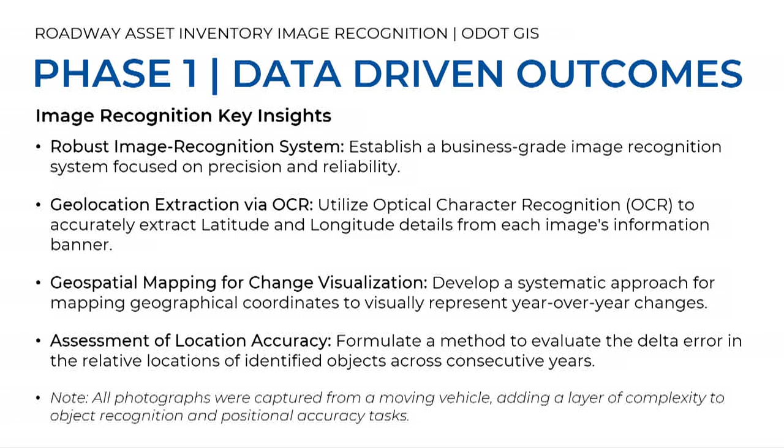In that first phase, we were able to model the majority of the assets. We looked at the assets, came up with a game plan and a statement of work on how we were going to tackle it, and we were able to produce some results. We took a stretch of roadway, and at first just bare bones asked, can we even get anything out of the video? And we were able to do that.

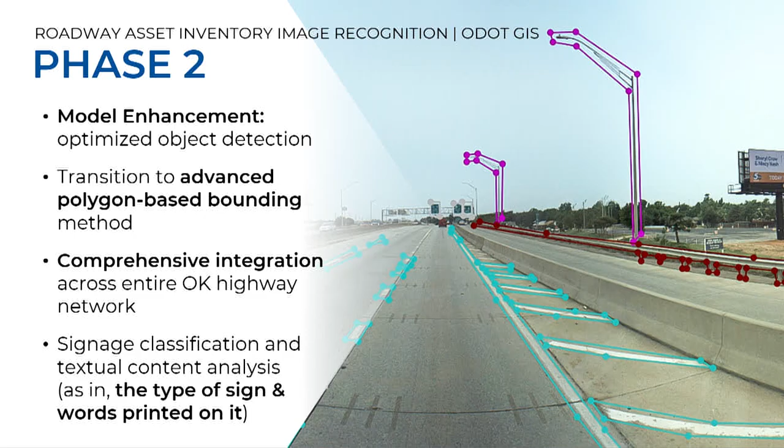So we moved into a second phase, and this is where we kicked it up a notch and really leveraged the Google Cloud platform and the AI processing within that. They were able to teach the AI to look for different assets, everything from light poles to the striping on the ground. The ultimate goal was to work towards more sophisticated components, the signals and lights, and eventually additional priorities there too.

The end of the good story is that over this last summer, we rolled this out to production, and it hits every single highway road mile across Oklahoma. That was about 52 terabytes of image data that we loaded into GCP and were able to process through.

So those 3.5 years of images - we went from taking a manual review of 2 years for one year of images, to getting through an entire year's worth of images in less than 3 months. It took a huge bite out of the manual lift to review those images.

The savings from ODOT's perspective: in that first year, if we had gone out and tried to use a vendor for this, it would have been pushing $500,000. We were able to do this for essentially the cost of the folks we worked with at OMES. We saved an estimated 10,000 manual review hours by the folks reviewing that video, which is a huge efficiency gain. We were able to take those employees who would normally be reviewing that video and get them reassigned to other priorities within the department.

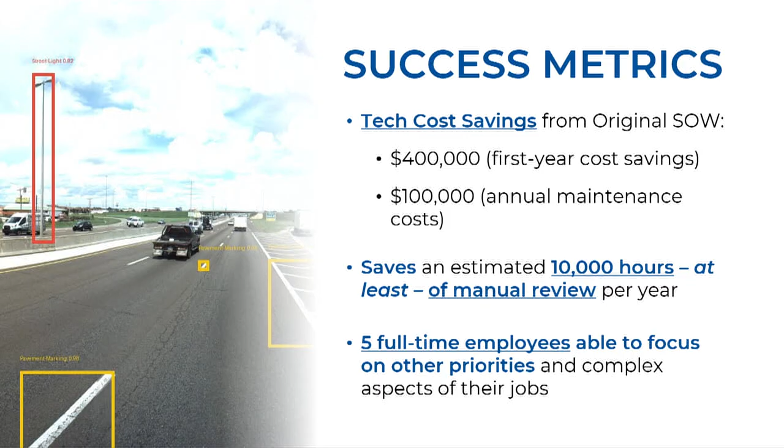So that was the first AI initiative that we tackled this last year. This next one had to do with our right-of-way deeds.

This one is a little bit similar. We've got a lot of paper documents, about 250,000 documents in total that have parcel deed information across Oklahoma. But we have no data on this - it's just paper documents, right? And so that's not super helpful for the folks at ODOT.

We have employees that would have to go into the filing cabinets if there was an open records request or even information the right-of-way team wanted to know. Very manual effort - go find it in the filing cabinet and then pick through it to figure out what parcel you're looking at.

So it doesn't sound like that big of a deal, but here's an example of one of the parcel descriptions. It takes a little bit of time for a human being to pick through that, and I can tell you from looking at a few of these from 50, 60, 70 years ago, they're wildly different. Sometimes they're handwritten, sometimes they have references that are a little bit hard to follow.

So what we were able to do was train the AI to essentially read that for us and cut out about 83,000 hours worth of effort. It was probably going to take us $6 million if we wanted human beings to go through and read every one of these parcels, about 20 minutes per parcel document if you were well trained. But the AI was able to read that in a much faster amount of time and give us an output, which is the parcel location, a traverse file that we can load into a GIS platform and then have a map of where this deed goes to.

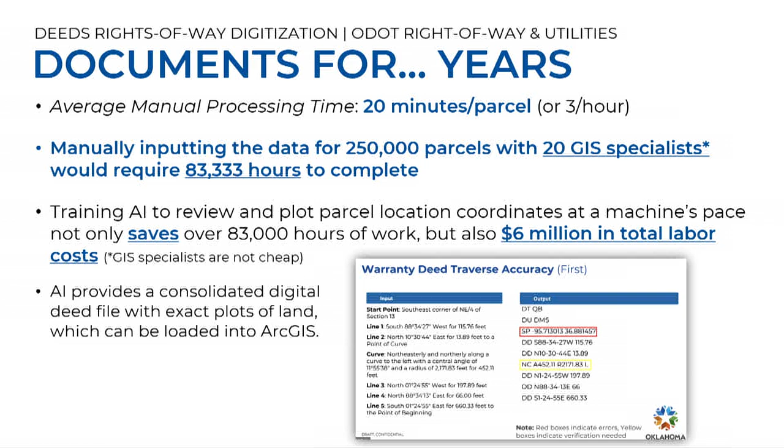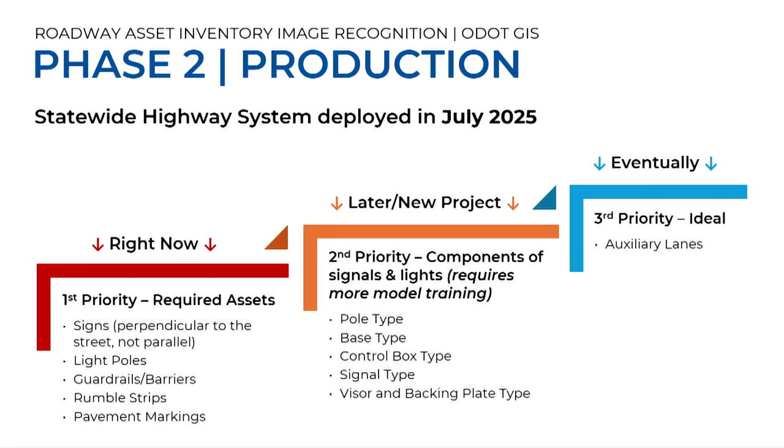Sounds good, thank you. Any other questions?

Providers, and you also mentioned about Google Cloud Services. Do you see any privacy issues with us releasing our data to third-party data providers, if they are proprietary data and so on?

That's something that we looked at when we started down this road, and that's built into the agreements that we have with the vendors, that none of our data gets shared with third parties. It's our data. Really, GCP is just a platform that we're doing our work inside of, and there's no risk beyond the usual security permissions and being able to share that out, the typical thing you run into with any closed system like that. But ours is Oklahoma data. We're not sharing it with anybody else, and we've looked at that carefully as far as the agreements we put in place before moving forward with any of the vendors.

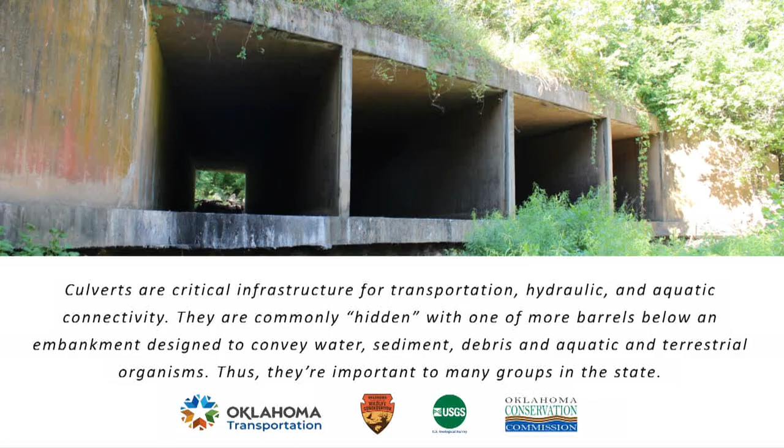So we've got a lot of people who care about these structures that we wouldn't normally maybe think about in our engineering practice. So our research, the primary objective was to first locate culverts - and we're gonna get into this bridge culvert discussion - to locate them, identify culvert characteristics that lead to vulnerability, but we also want to identify these partners who we know care about culverts, who we can work with to retrofit some road stream crossings, and we can align not only our infrastructure goals, but also conservation goals.

And so this project has been part of SPTC Cycle 1 and Cycle 2. Some of the strategic goals we felt like this hit was resilient infrastructure, resource allocation, and developing partnerships. We had a number of tasks, and I thought this first task won't be so hard, a collection of culvert locations. But boy, this task was harder than I realized. It's challenging - creating a database, doing some site visits, developing a vulnerability framework, looking at different mitigation strategies that might work for us here in Oklahoma, and then some reporting.

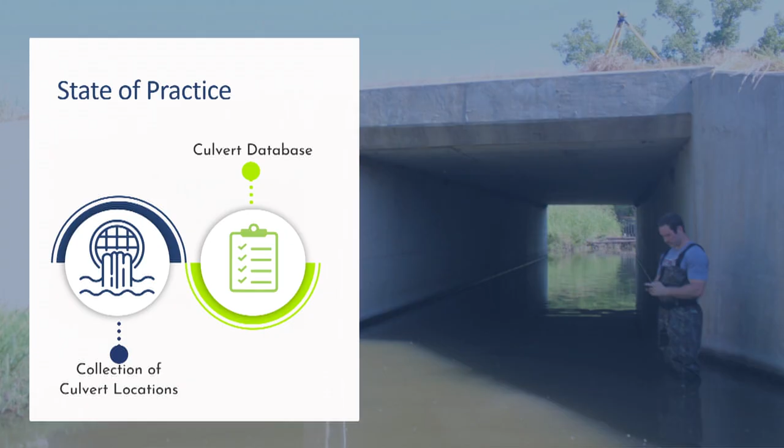Now, I'm gonna be honest, we spent a lot more time in these two tasks than I ever thought we would. So, for my bridge engineers, I looked to you all, and that's right, if it's over 20 feet, it's considered a bridge. It might look like a culvert, might act like a culvert, but if it's over 20 feet, it's a bridge. But the best data that we had, or the best asset management we had of culverts, were bridges that were box culverts or similar.

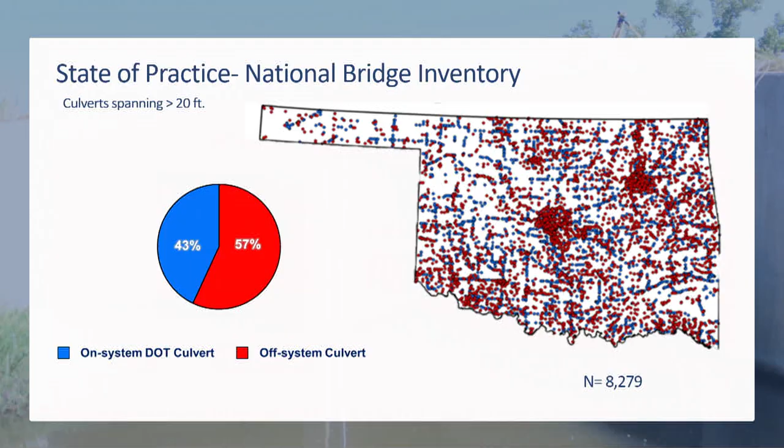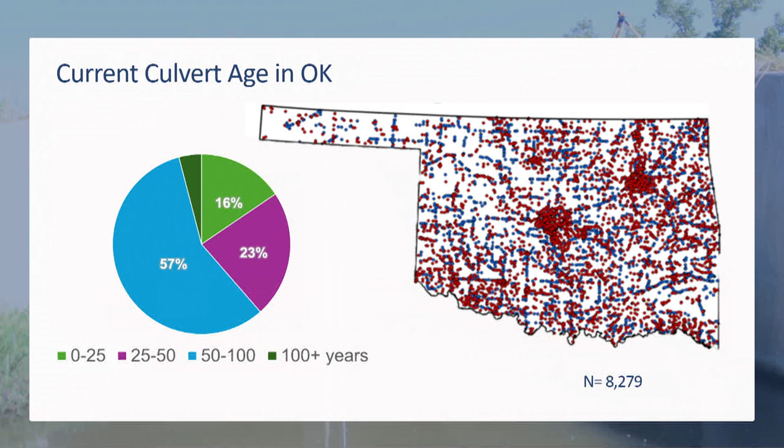And when we started looking at the National Bridge Inventory, we saw it was close to half were on the DOT system, a little bit less, but more were off the DOT system. And then we started looking at the age of these culverts, and more than half are between 50 and 100 years old. Our culverts, or bridges, are getting older, and these are culverts - this is just looking at culverts, taking these out of the NBI.

So we started, like I said, we relied on the data that we had. Thank you all who contribute to the NBI. And we looked specifically at culverts in fair to failed ratings, so 0 to 5 on a 9 scale. And we picked 104 of these sites in 22 different counties to visit. That is a lot of field work, and it takes a lot of folks to do it. And I want to give a special thanks to the team that made it happen - Tom Neeson at OU and Sarah Bondi, a student, and then several of my students at OSU.

The first thing that we did when we were out on site was look, do the culverts match the data that we have. And there's several highlights here where really the field measurements didn't actually line up with what we were seeing.

But again, we weren't only looking for infrastructure parameters. We also wanted to look at culverts that might support conservation efforts and that aquatic and terrestrial connectivity as well. And so in addition to the different NBI parameters, we also looked at the Southeast Aquatic Resources Partnership, which has a methodology to look at a road stream crossing to see if it is passable or impassable by fish.

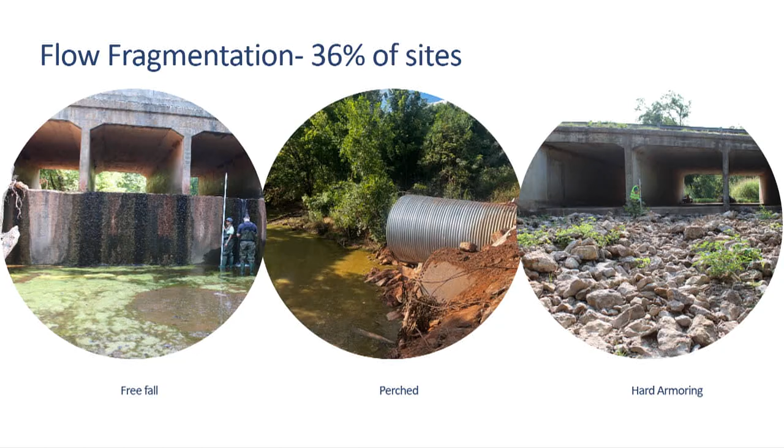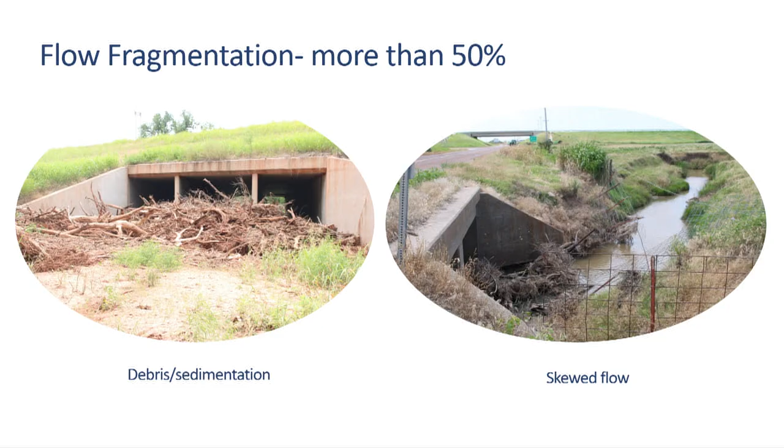Okay, now we were looking at any hydraulic structure and all of the possible road stream intersections in Oklahoma. There are a lot of road stream intersections in Oklahoma. We determined this by overlaying both the hydrography and the transportation network. And we found that only 19% of hydraulic structures are represented on the NBI. So there's a lot out there that we don't know about. Thus, finding them is very challenging, and creating a comprehensive database is very, very challenging.

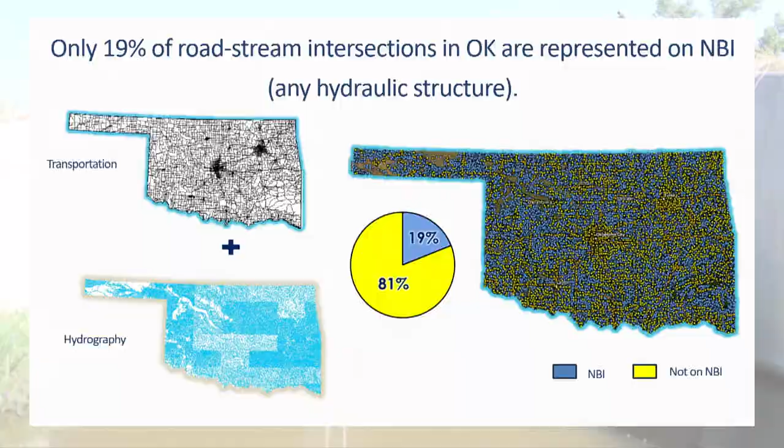Now, we're not the only people working on this. We've helped pull together some people on the aquatic connectivity team in Oklahoma. This has partners from the Conservation Commission, OSU-OU, ODWC, Nature Conservancy, and US Fish and Wildlife. We had a 2-day road stream crossing inspection training where we were looking at these structures for both infrastructure and conservation priorities, in addition to just a meeting like this to try to get priorities aligned.

Now, some of the goals of this team include a GIS inventory, creating a tool to prioritize structures where maybe we can work together. Maybe it's not just ODOT investing in these structures to retrofit and rehab. Maybe there is money available from US Fish and Wildlife to make something more passable. So how can we prioritize these and be talking the same language and developing state teams to help us figure this out? My research group alone is not big enough to comprehensively map all culverts, but now we've got a lot of players coming together for this.

Now we have an aquatic connectivity barrier inventory and prioritization subgroup. We're active. There's a blitz next week if anybody wants to go out and look at these culverts with us. Happy to have you. But we're looking at priority watersheds to complete inventories. This is, where do we have species that are going to be impacted by stream fragmentation? And we want to prioritize those. We also want to identify funding sources and partners to bring to the table.

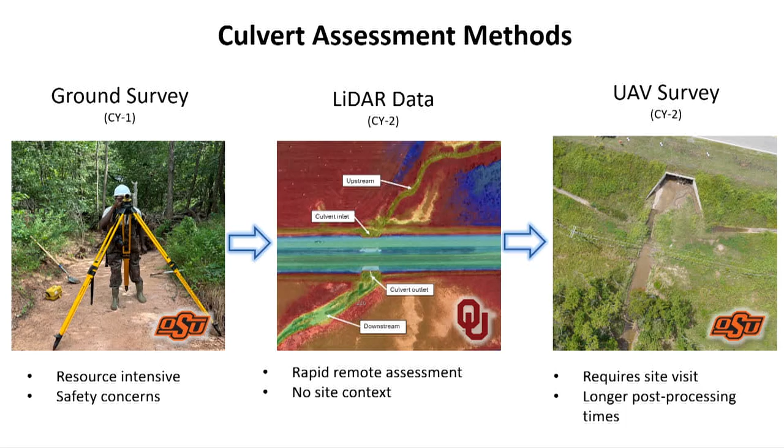Some other things we're doing to try to improve and determine where these culverts are: looking at different remote sensing methods, using things like publicly available LiDAR so we don't even have to go to the site. Maybe we could just do a rapid remote assessment. There are some parameters we can get, but we still miss a lot of the site context. And employing UAVs to do quicker visits and improve the safety of those visits.

Our partners at OU, again Dr. Tom Neeson, big thanks to him, are working with some of the publicly available LiDAR data and seeing if this matches up with the data we've collected in the field through this project and some others.

What we're seeing is that with structure length or more of those surface type measurements, we're getting really good agreement with the LiDAR data. But things like outlet drop, these more vertical measurements, are really challenging with the LiDAR data.

So we're starting now to explore UAV photogrammetry and putting together these 3D models to see if we can fill in some of the gaps. We still need to go to the site and fly it, but our site visits are much, much shorter. We can normally fly our culvert site in about 4 minutes. There's some more time for setup, but it's pretty quick. And so we can develop these 3D models and figure out some of the parameters for those inspections.

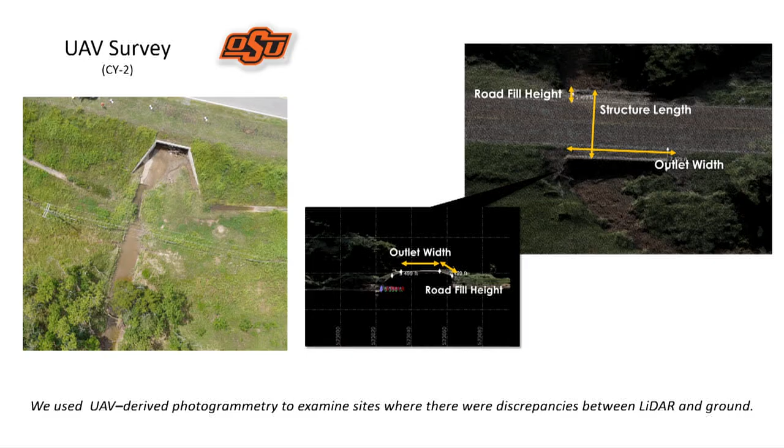What we're finding is we're getting a little bit closer with those vertical measurements, but we're still off. We've got really great agreement again with structure length, but if we look at things like inlet height, we're off between our ground measurements and our UAV.

Now what we've been doing is using a fixed wing drone, so it's taking these photos just straight down. We've partnered with a collaborator, Dr. Chen, who has a multi-rotor drone, and he is now able to look inside the structure as well. So we're looking at connecting those photos to try to improve this vertical measurement accuracy.

Some additional things - there's a lot of people in this room who've supported this research. Dan Cook said, hey, out by my house there's a collapsed culvert. And I said, oh, we've got to go. And what we found was actually it was the road around the culvert.

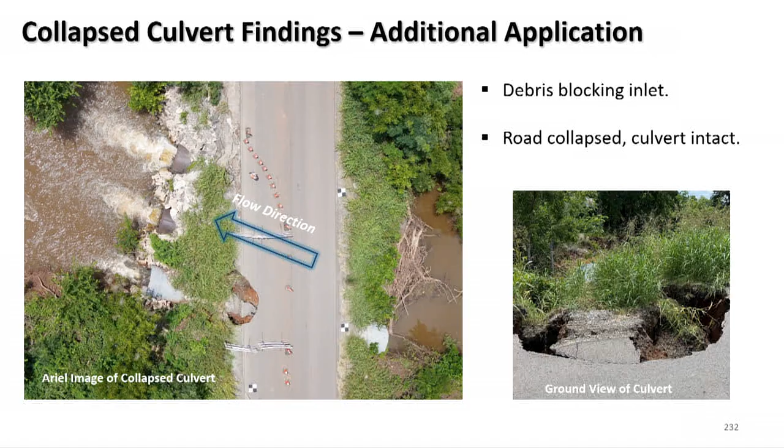If we just went and did our ground inspection by foot, we'd see something like this photo, this ground view of the culvert. But when we look over top, we can get the whole picture. We have debris blocking an inlet. The culvert is intact, but our road has collapsed on top. So we're finding through this project there are additional applications as well.

And Megan, my grad student now, is currently mapping a HUC 12 for all of the culverts, and we're comparing the LiDAR methods and the UAV survey data as well. This is a subwatershed in the Little Blue River.

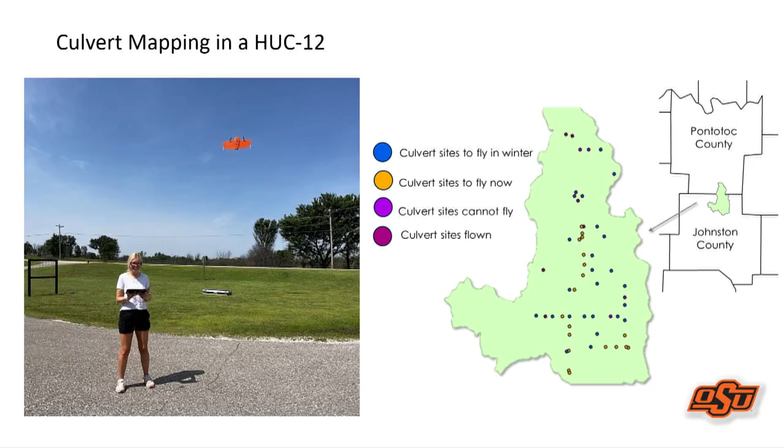So a couple of takeaways here: our smaller culverts are overlooked, they're hard to find, but we're trying to find some asset management strategies improved with modern technology and available remote sensed data sets. And as our infrastructure is aging, we do have new design criteria and incentives for aquatic organism passage. So maybe we can consider mutual prioritization of the sites we're looking at and the investment.

I always think we're better together. And while partners might have different priorities, there can be some crossover even when we don't expect it. We do have to learn to speak the language of our partners and have the harder conversations to align on these things.

So that's it for my talk today, but I'd be happy - I love to talk culverts. My email's on the screen, but thank you so much, and I will pass it on to the next.

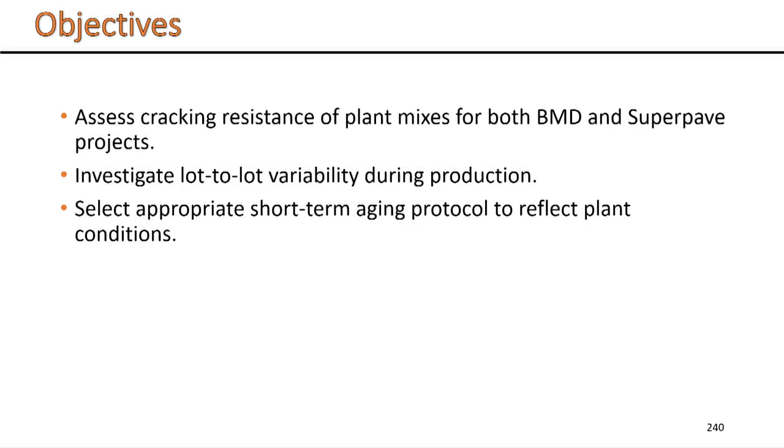We looked at different projects across the state. We had 6 projects selected for this study, located in different regions. We have different types of mixes, called S4 mixes and B4 mixes. S refers to the Superpave mix, and B refers to the BMD mix, so just two different ways of doing the mix design.

For each mix, this table shows the virgin binder and its grade. By the way, if you haven't worked with asphalt before: when I say asphalt, I'm talking about the asphalt mix. When I say binder, I'm talking about the asphalt binder that holds the aggregate together - that black sticky material. The asphalt is just the entire mix.

In this table we had different mixes, 6 in total, using different virgin binders - neat binders and polymer modified binders. We also had mixes that contained RAP, which refers to reclaimed asphalt pavement. It's just recycled asphalt that we use to make new asphalt - old asphalt milled from an old pavement that we're able to take back and recycle into a new mix.

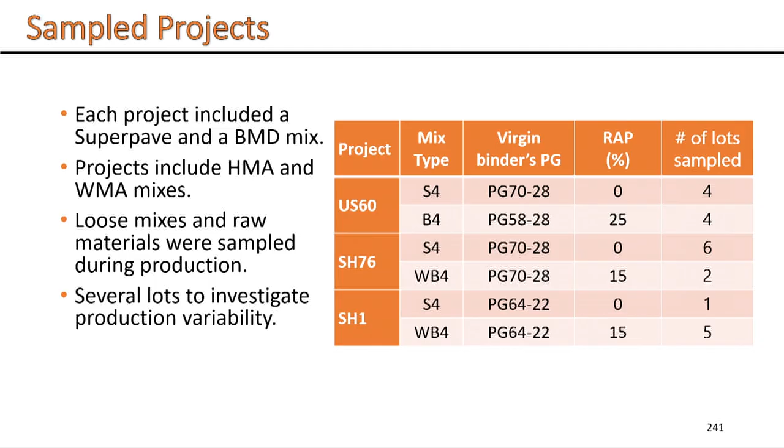We had these different mixes sampled from different projects, and for each mix we collected samples from different lots. A lot represents 1,000 tons of production. Depending on the size of the project, we decided to take one sample per lot, so that we're not just looking at the project overall, but also looking at lots within each project. This table also shows the number of lots sampled from each particular project.

So this is the overall plan. We started with mix sampling. We had 3 projects in total, constituting 6 mixes, for a total of 32 lots that we sampled.

We had plant mixes collected from the plant, and at the same time we collected raw materials which we used to make lab mixes. This way we're able to compare mixes produced in the plant versus mixes produced in the lab. We subjected those lab mixes to different aging conditions to see which aging condition simulates what happens in the plant. So we had this extensive plan laid ahead.

For each of the plant mixes, we did testing that involved looking at the binder and the mixture. Same thing for the lab mixes - testing on the mixture and the binder. We combined all these results together so that, by comparing the plant mixes and lab mixes, we're able to select a short-term aging protocol that considers what happens in the plant.

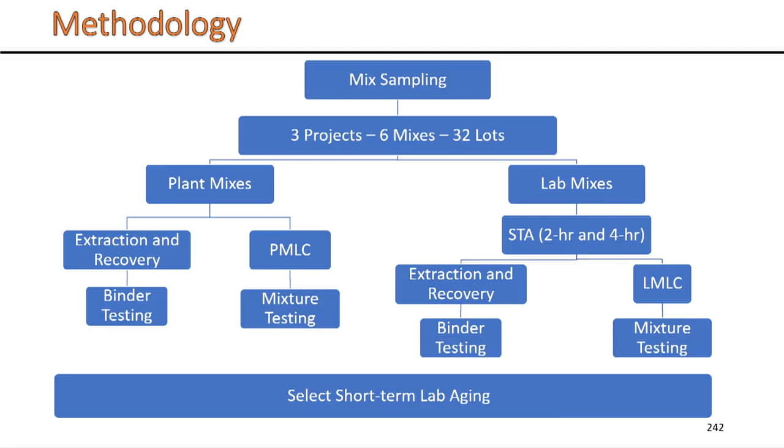As far as mixture testing, we used a simple test called IDEAL-CT. It's a cracking test, an indirect tensile test. We have a cylindrical specimen that we subject to a compressive force. This compressive force creates tensile stresses within the specimen and breaks it into two. We take the load deformation curve, do some analysis on it, and come up with a parameter called CT index, which is essentially a measure of the cracking resistance of the mix.

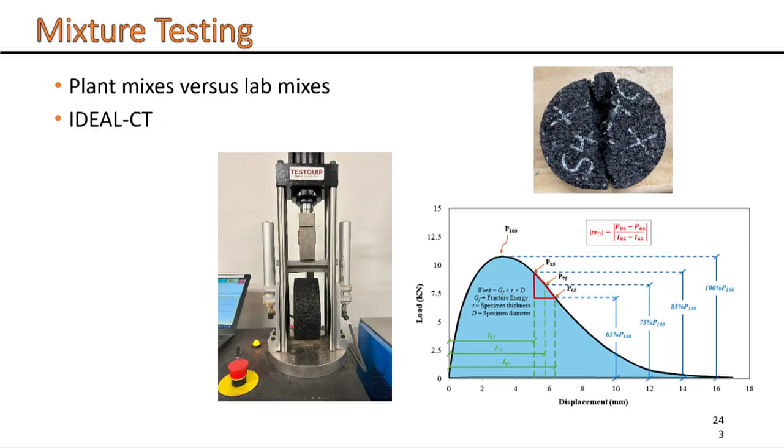This can be very challenging when you're trying to put specifications based on this for acceptance in the plant. Depending on which lot you're sampling, you could get completely different results. So this could be a challenge in terms of writing down specifications.

It also raises the question of, if it's the same mix, how come we're getting totally different results depending on what lot we're sampling? There must be something going on during production that induces this variability between the lots. And this is something that was true for all the mixes that we sampled.

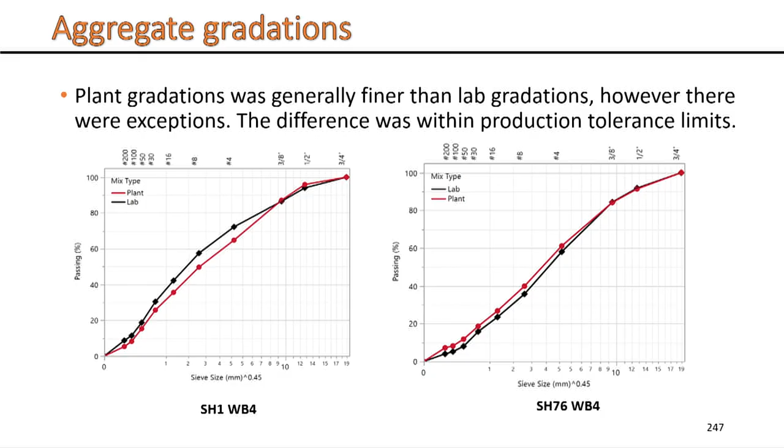We also looked at aggregate gradation between lab mixes and plant mixes, and for the most part, plant mixes were finer, which was kind of expected. However, the differences were really within the production tolerance limits, so the differences were not as significant.

Besides the mixture testing, we also wanted to look at the binder itself, so the asphalt binder. We did different types of testing to look at high temperature binder properties, low temperature binder properties. We had this machine in our lab which does extraction recovery of the mix.

This basically works like a washing machine. You throw in the asphalt mix inside the machine, and then the machine separates the asphalt binder from the aggregate. This is a nice way to look at the binder properties if you have a plant mix and you're trying to test the binder from that plant mix. So we run it through the extraction recovery where we separate the asphalt binder from the mix and then take the asphalt binder and run it through binder testing.

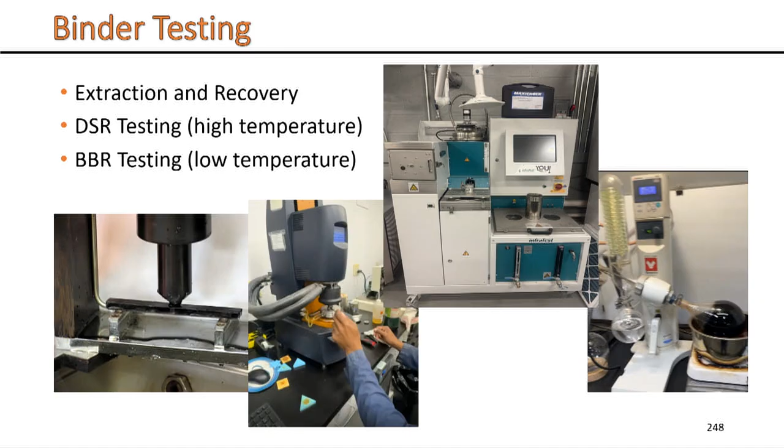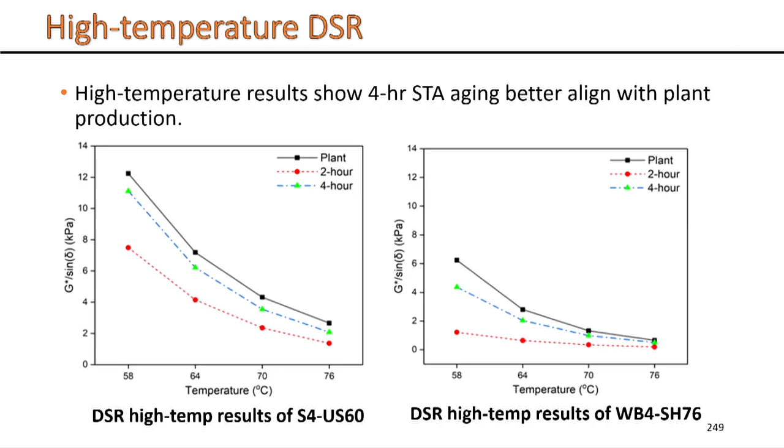This is an example of the results from the high temperature testing. Again, these results also align with what we found out from the cracking test, as 4-hour aging seems to align better with plant aging.

The first thing is that when we compare the recovered binder with the virgin binder, the recovered binder was stiffer, and this has to do with the RAP that was being added in some of the mixes, and also the different plant conditions compared to what we're doing in the lab.

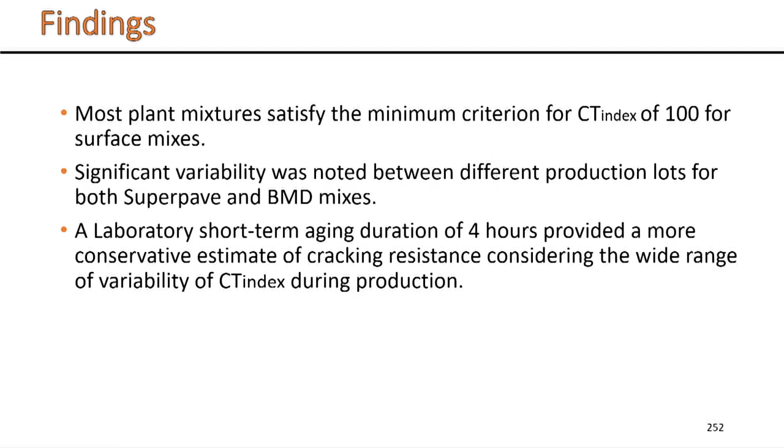So with this, I would like to thank you again for your attention and welcome any questions.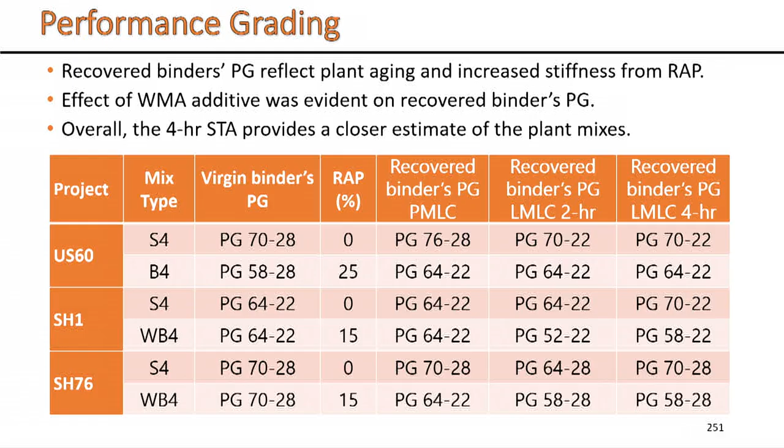Mohammed, this is a very interesting and important topic. Aging is a very hot topic, as you all know. You looked at one aspect of aging, which is kind of limited, but how do you see it? First, you saw a high degree of variability—what do you do to reduce that? Second, some of these mixes are produced at different temperatures, like warm mix. What would be the impact of warm mix versus hot mix, even though the temperature may not actually change that much? So it may not really be warm. Last, what does this mean relative to pavement performance? That's what we really care about—how can you reduce the impact of aging with better understanding so we have better performing pavement?

I have probably too many questions. Okay, we'll answer whatever is doable. Yeah, these are all good questions. I'm not sure if I'll be able to tackle all of them, but they're all valid and very important. So I guess the first question was, what is causing this aging, and how do we control it?